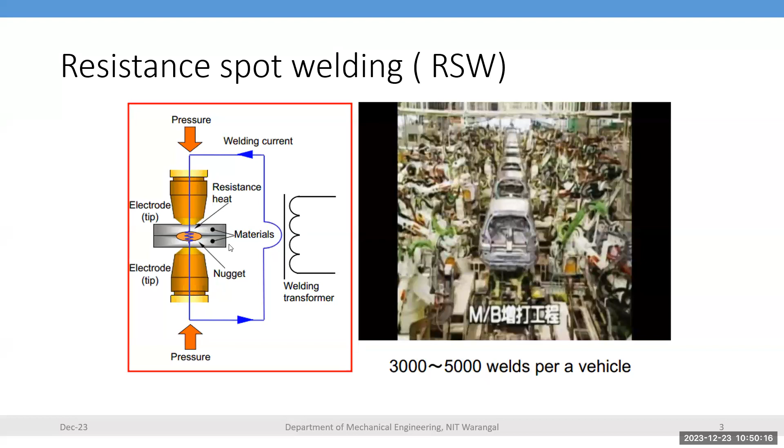Then how to judge the quality of resistance spot welds based on kinematics, dynamic mechanic properties, continuum mechanics, elastic and plastic deformation, and fluid dynamics, because you are melting the material and applying pressure between the two plates so that the material will flow in a particular direction. Then you can see the flow characteristics of the material during resistance spot welding.

Then thermodynamics, because heat is involved in the process, how heat is affecting the material properties as well as the electrode and other areas. Then electrodynamics, you are changing the resistance by applying heat. Sometimes you can have constant resistance, current distribution, and what is the Joule effect.

How heat is generated in resistance spot welding is H equals I squared R T. I is the current, R is the resistance, and T is the time for supplying the current. Based on that, heat is generated. So when resistance is very high, then heat generated is high, and when current is also high, then heat is also high. So based on these three input parameters, you can determine how much heat is required for a particular thickness of material to be welded through the resistance spot welding process.

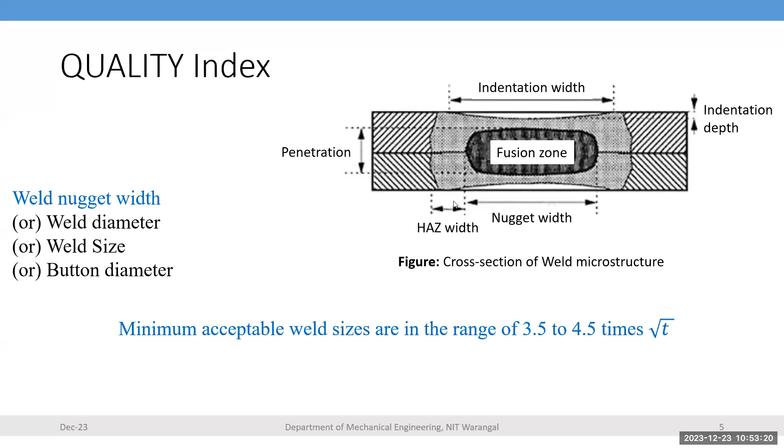This weld nugget geometry creates a need for monitoring data due to the complexity of the basic resistance spot welding process, and the complicated interactions between the input parameters, material properties, and input conditions of the process - so that we have a lot of interaction between the variables.

Then process conditions such as electrode wear, because you are doing multiple welds over a period of time. Due to that, heat is accumulated at the interface of the sheet and the work material. Anyhow, you are applying pressure, and due to that, heat accumulates over a period of time so that material degradation takes place, and wear of the electrode occurs during the process.

Then workpiece fit up, and water cooling rate - because you are circulating water to reduce heat accumulation in the electrode material. Then machine compliance, because you are applying force and other parameters, so what is the compliance of the machine.

Then electric current and voltage displacement and dynamic resistance signals, because you are supplying current and voltage during the process so that heat is generated. That heat is utilized to melt the two adjacent materials.

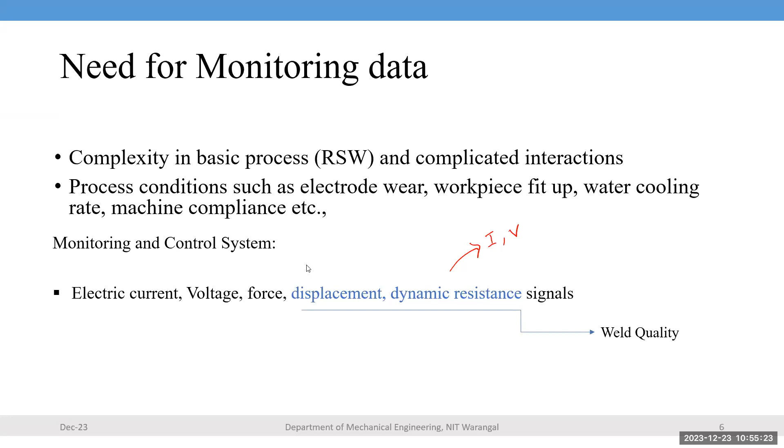So this quality of the weld, we can say is a function of dynamic resistance. The RSW, abbreviated as resistance spot welding, has monitoring and control systems. The welding system includes welding schedules and a monitoring system for how to monitor the entire data through DAQ and signal processing, and a control unit that takes care of all diagnostics and signal control.

The DAQ measures electrode voltage and welding current, how much welding current you are supplying in a cycle, and whether there is any variation during the cycle based on changing resistance. Then how much force are you applying? And what is the electrode displacement? Because every time it may not be aligned with the bottom of the electrode, the alignment may change, and due to that there will be a change in the nugget growth process.

The electrode tip voltage and current will tell you how much heat input occurs during the process. If you apply less heat than required, the weld nugget is not formed. If it is more than required, expulsion takes place during the process. So these are the two bad effects: low and high heat input will result in expulsion as well as the nugget not being formed, and due to that the weld fails.

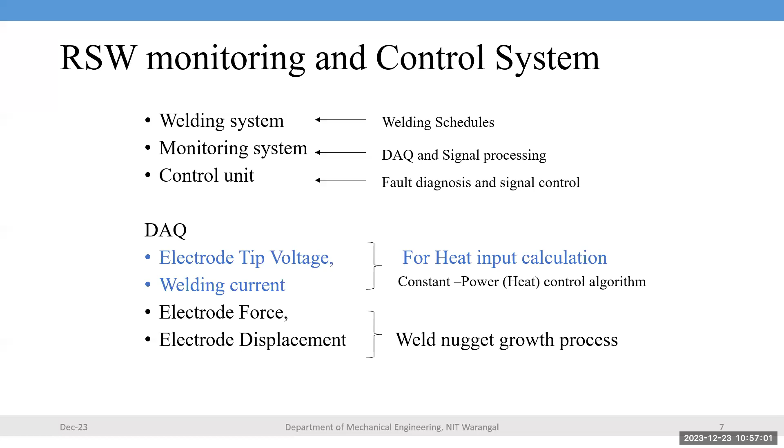Apart from that, heat is accumulated over a period of time, causing expansion of the material, because the material should have electrical conductivity and thermal conductivity. Then expansion takes place, then melting and expulsion, because of electrode displacement and force.

Dynamic resistance is a measure of electrical resistance change during welding, calculated from electrode tip voltage and current. That depends on the voltage and current you are supplying. You can also get the dynamic resistance from this. This is the basic information about the process.

That shifts the axis from one exact plane to another area, which leads to inconsistent heat generation during the process. Then there's the shape of the tip end. The tip end may change shape, which will change the resistance, so the heat generation also varies.

So this is the construction of a fully reliable resistance spot welding system, Toyota Motor Corporation. The welding current on the left side, applied pressure and welding time, and tip misalignment, tip end diameter, tip end curvature, edge welding, angle misalignment, sheet metal thickness ratio, sheet gap.

So as far as the project is concerned, either at BTech level, MTech level, or master's level, without applying machine learning algorithms, we only have to take a few, 3 or 4 parameters. For example, welding current, applied pressure, welding time, and sometimes we can also take angle misalignment, sheet metal thickness ratio, and sheet gap.

Based on that, we give input parameters so that we can get some output in the form of nugget area. So there should be a relation between the input condition and output condition, using statistical regression analysis. From that we expect the result, the outcome of nugget diameter or shear strength of the welded joint, which will give only 80 to 90% accurate results.

But nowadays people are not accepting this 80 to 85% response, because ultimately you are going to automate everything. So even a small change in the parameter will affect the entire system, leading to a lot of loss in the company. That's why this is not sufficient; an exact requirement is needed for automation of the process.

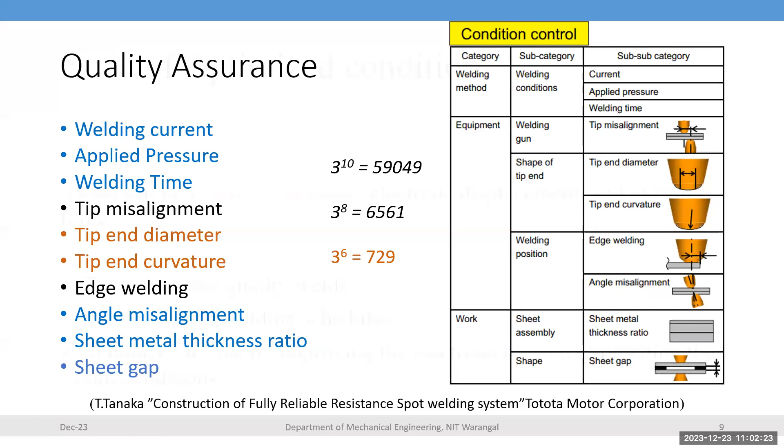Then we'll see what is the need for optimization, what is the important aspects you are going to get for optimizing the results, so that you can get the full automation of the entire process.

So then you need to observe the dynamic resistance during the process, electrode displacement, and dynamic force. These three things are important to analyze the data, and you can predict the performance within the acceptable limit.

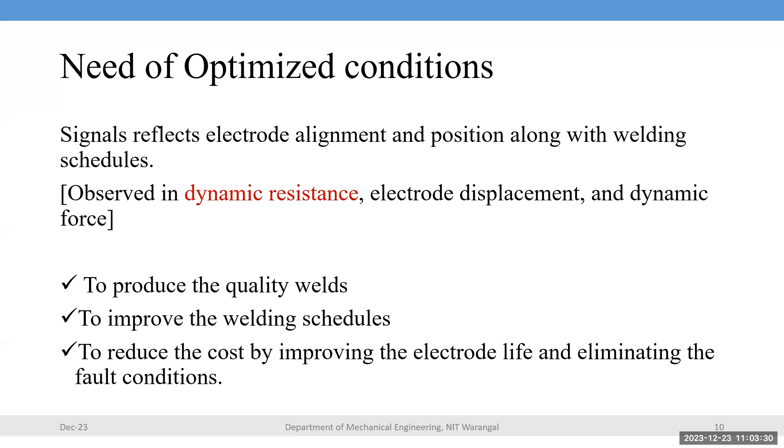From this observation of optimization, you can also produce the quality of the welds, improve the welding schedule, and reduce the cost by improving the electrode life and eliminating fault conditions. The signal reflects electrode alignment and position along with the schedule.

Then you are supplying the current and time, so the heat is generated, and the resistance increases to a certain level. Then after melting, it still increases to reach the maximum value. Then you apply pressure, because you are going to stop the supply of current. Then you apply the pressure, so that the nugget is formed, and the resistance changes.

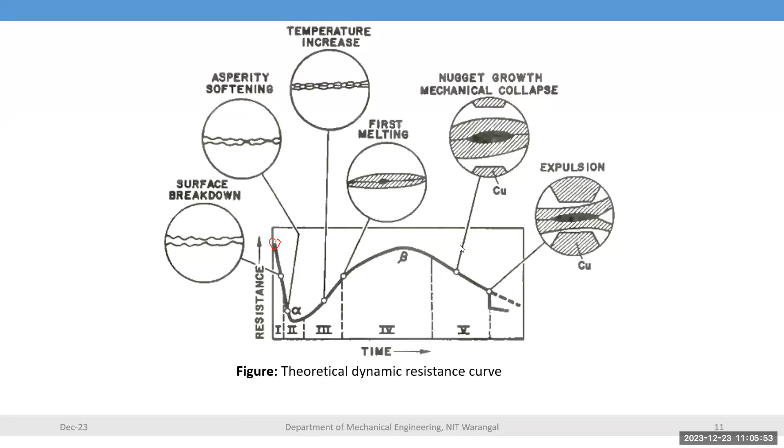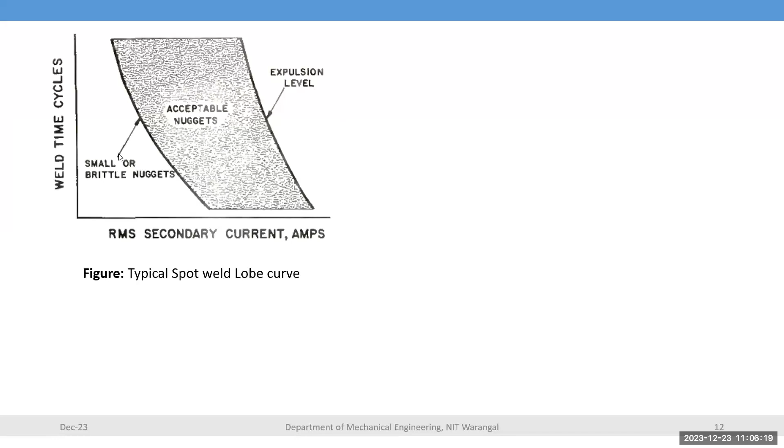Now, based on the RMS root mean square secondary current in terms of amps and the welding time cycle, this region is the acceptable nugget area. Beyond that, you have the expulsion level, and before that, smaller or brittle nuggets that lead to a defect kind of weld. So you can see the various dynamic resistance electrical parameters during spot welding of mild steel—resistance, current, and voltage.

You can see the normal curve without any expulsion, shown with a continuous line. This is the dynamic resistance curve. And you can see the voltage—you are going to supply the voltage up to maximum, then we are going to decrease the level.

Similarly, the current decreases, and after that it is almost constant, so you can understand very well about the dynamic resistance, voltage, and current, so that you are able to correctly get the relation between the input and output parameters.

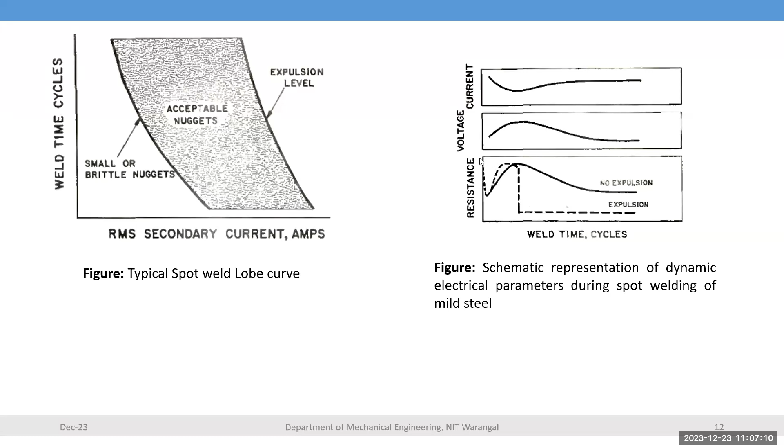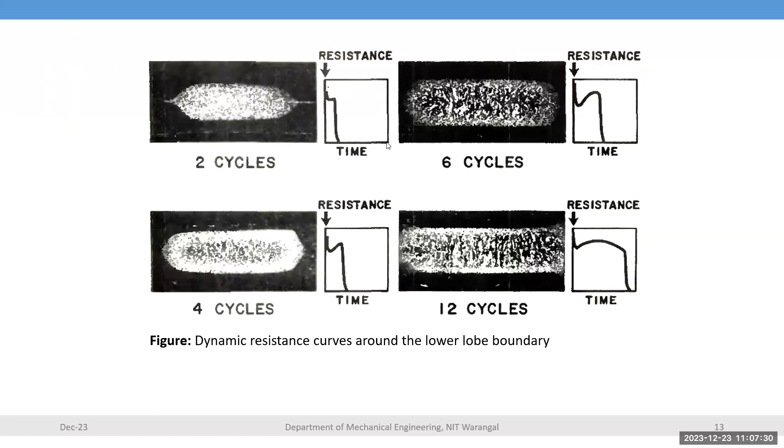So this is the number of cycles with respect to how the nugget is formed—this is 2 cycles, 6, 4 cycles, and 12 cycles. Based on that, you are getting the data from the controller. You can get the resistance, how the resistance is. As the number of cycles increases, the resistance curve also changes depending upon the number of cycles.

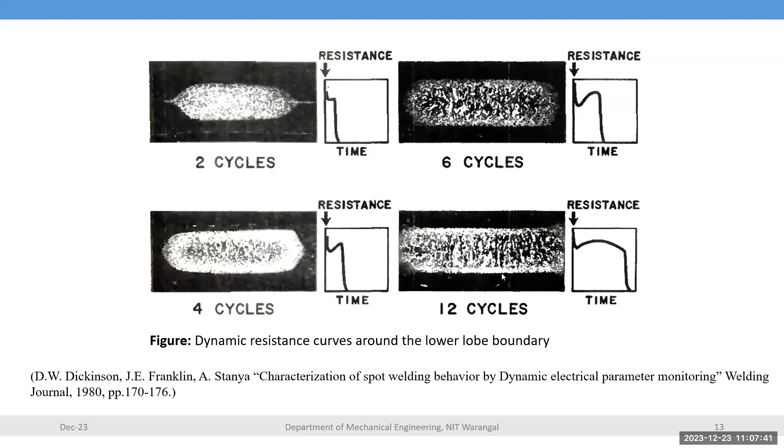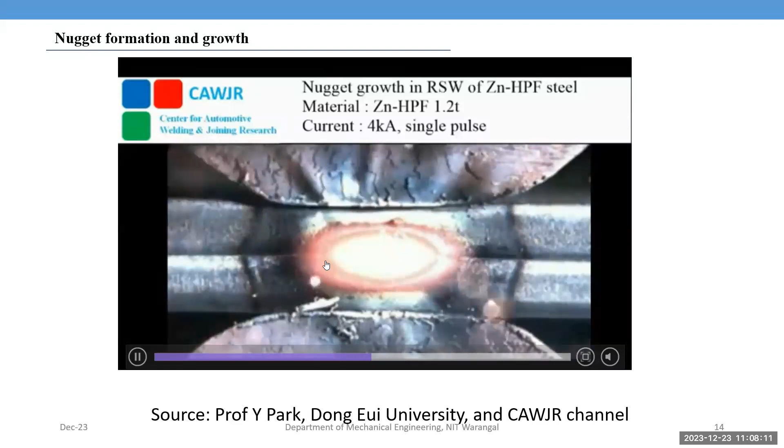Yeah, this is a resistance spot welding video. Just you can see how the weld nugget is formed. The smaller portion is melted, and you can apply the pressure, then allow it to cool, so that the black portion is the edge region, and the orange color region is the nugget portion. This diameter will define the strength of the resistance spot welds.

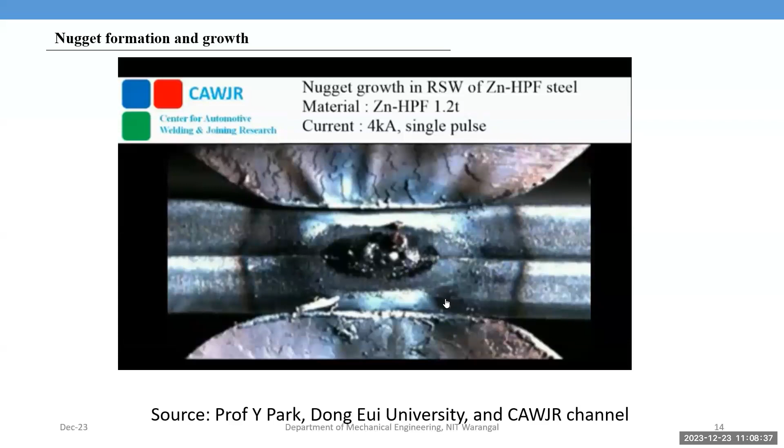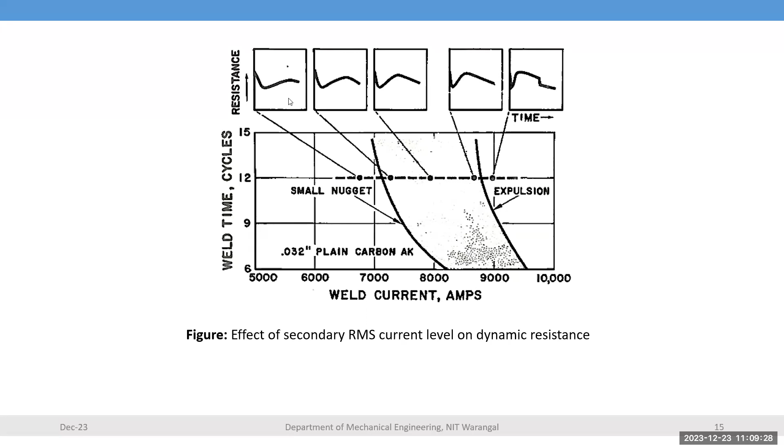Then if it is expulsion, you are going to get this kind of curve. If it is a small nugget, you are going to get this curve. So 1, 2, 3, and 4 look the same, but if you observe keenly at a high magnification level, there is a difference in the profile of each and every parameter.

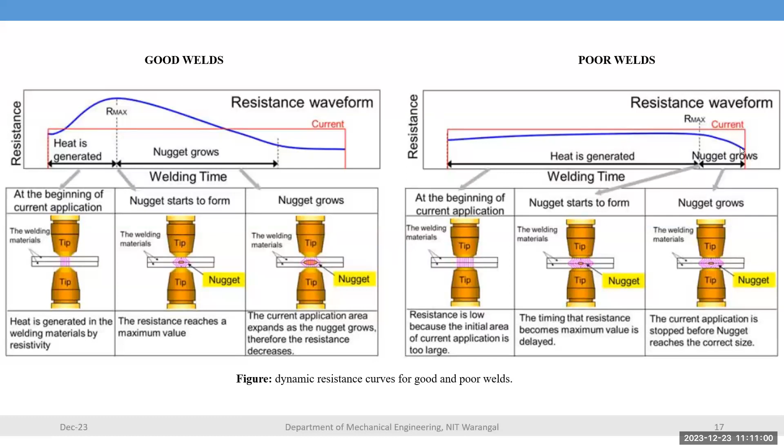Then machine learning algorithms require some characteristic data analysis, because you have to design the system in a very effective manner without any change in the quality of the welds. Now, this is the dynamic resistance curve. The x-axis is the weld time or weld cycle, and the y-axis is the welding resistance. Then what are the parameters involved in a particular shape of the curve? You can define these variables.

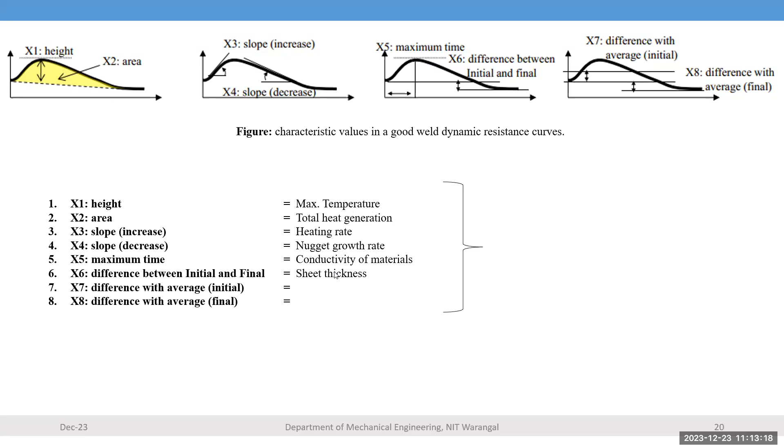So X1 greater than or equal to maximum temperature rise, and X2 greater than or equal to total heat input. X3 is the heating rate, and X4 is the nugget growth rate. X5, peak formation time, more means delayed peak. Nugget growth time is gradual if more. Heating rate is more if positive. Resistance drop greater than or equal to surface breakdown if negative. X8 more means gradual nugget growth or expulsion less.

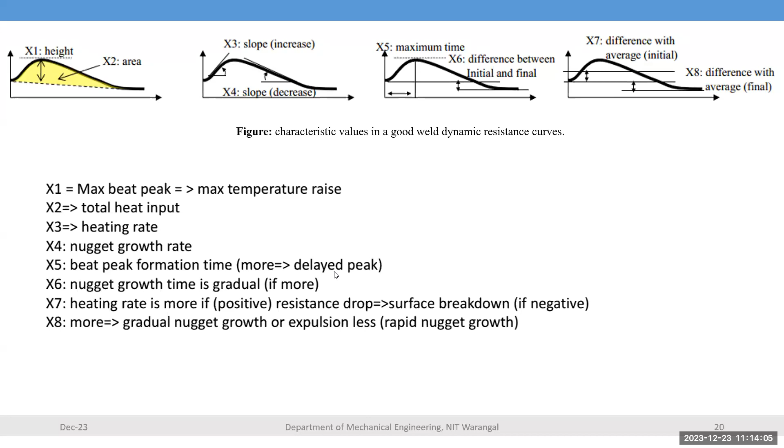So apart from this, set two of the experiment has 16 characteristics instead of 8. You can also extend it to 16 characteristics. 1 to 8 is set one, and for 9 the minimum time, that is alpha, is defined. Alpha is peak formation, that is nugget growth end. X12 is a positive or downward curve, X14 is energy required for melting, and X16 is maximum final slope, greater than or equal to negative growth.

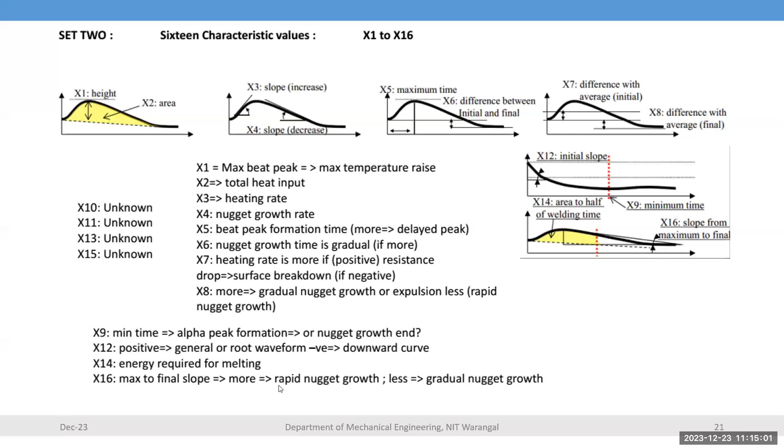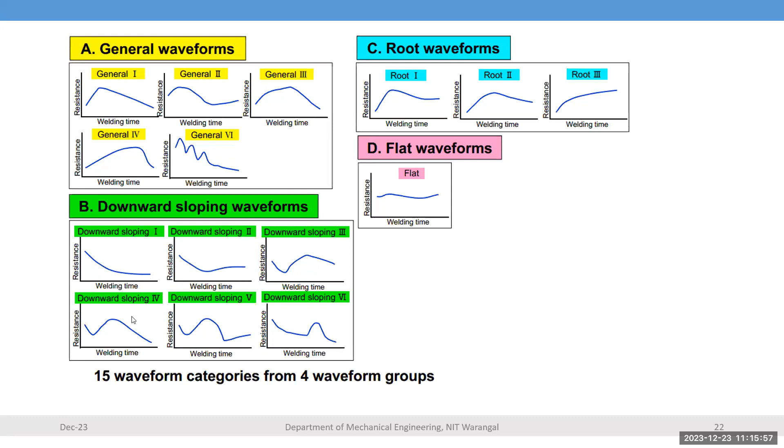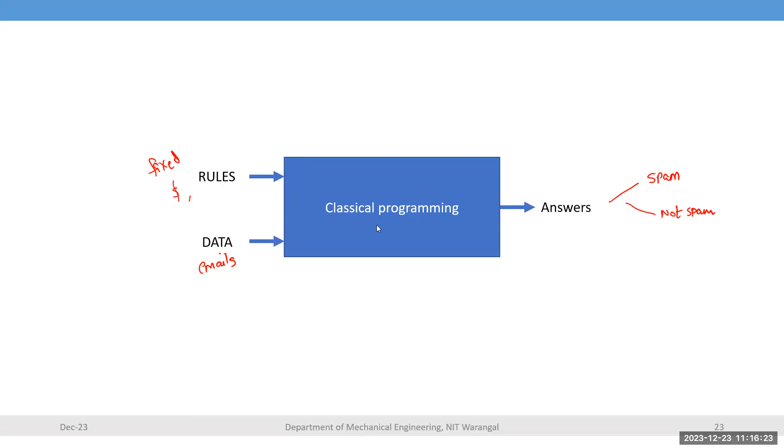Then downward sloping waveforms: this is upward and this is downward. Slope 1, slope 2, slope 3, and slope 4. These you can already define in the machine learning algorithms. Now, classical programming requires data. How much data is required for programming classical programs so that you can get some defined answers? Then what are the rules that are required for the classical programming? Now we will come to machine learning.

So before these slides, first you need to understand the system. From that system, how you are defining the variables, then what is the effect of each and every variable on the dynamic resistance curve. Based on that, you can have some input data. That input data is given to the machine, and it will train and give output in an effective manner.

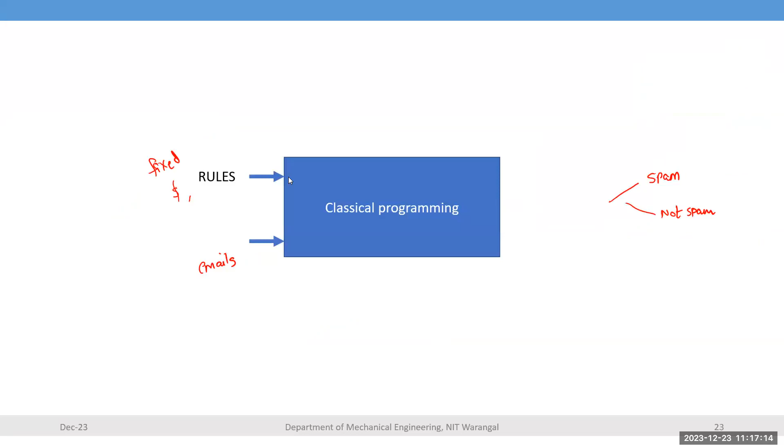So first, initially we have to give the input data of welding parameters, work parameters and tool parameters. From that, you can get the dynamic resistance curve. From that dynamic resistance curve, we can analyze the data and give an effective method of interpretation of the input and output variables.

So you are giving some input to the machine learning, and you expect some output or targeted value. How much target is required, that also you can give as an input for the machine learning. That is maximum and minimum. Beyond that, we cannot go for the interpretation of the data. Within the minimum and maximum level, we can work on this.

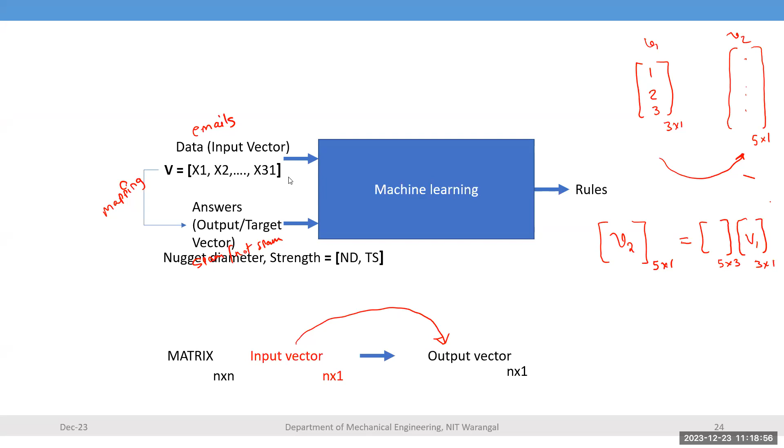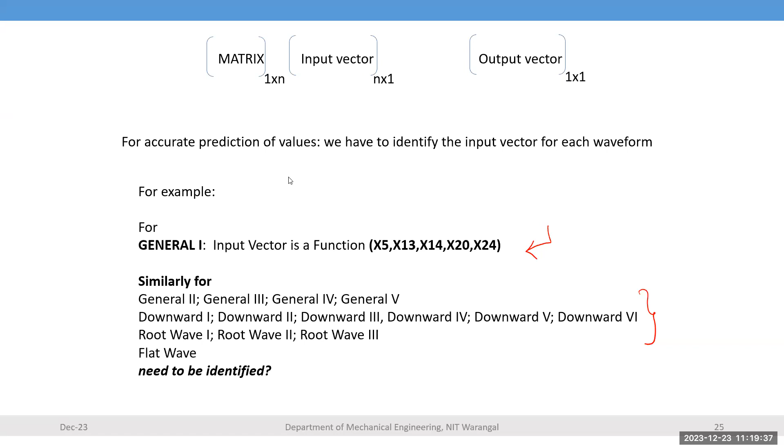Now it is in the form of a matrix 1 into n, that is x1, x2, x3, x4 variables, and the input vector n into 1, then the output vector. So for accurate prediction of values, we have to identify the input vector for each waveform. For example, the general one input vector is a function of x5, x13, x14, x20, x24. Similarly for general 2, general 3, general 4, you can identify which variable is more dominating with respect to general 1 or 2, etc. That needs to be identified.

Then what are the steps involved in machine learning algorithms? Initially you have to gather the data. Decide what data is part of the problem. The data is reflected in your output parameters. So whatever data you are giving as input to the machine learning algorithm is more important. And more and more data will give more accurate results.

Then preparing the data, ensuring that there is no bias between these three or four values, because during experimentation, suppose you are giving one input condition and you run the experiment for more than 3 or 4 trials. For example, one value is 10, another is 12, another is 11, another is 10.5, another is 25. Three values are very close, and the fourth one is away from them.

Then you can eliminate that fourth value from the input data for the machine learning algorithm, because there is some variation in the process that leads to a value other than one near your mean value. So the mean data is important. Data nearest to the mean is very important as input to any machine learning algorithm, so that you can get an effective relation between the input and output conditions. You can also train the data effectively. So that is important: there is no bias in taking the data from a number of points.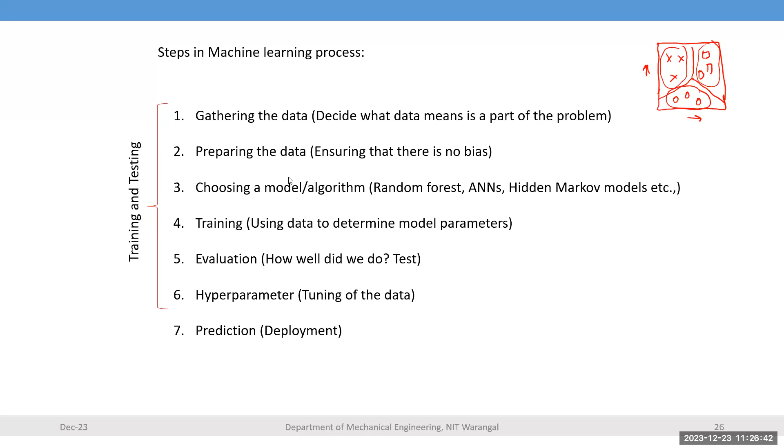Then hyperparameter tuning. Suppose data is inconsistent in some cases, then you can tune the data as per your requirement or as per your model. Then prediction and deployment: how you are predicting the future performance based on your algorithms.

I'm not going into detail on machine learning because many speakers have already spoken on supervised and unsupervised learning. For mechanical engineering, we need to learn more on supervised learning because the property is available for a certain data set, but is missing and needs to be predicted for other instances. Where quantitative values are available, you can use the supervised learning process.

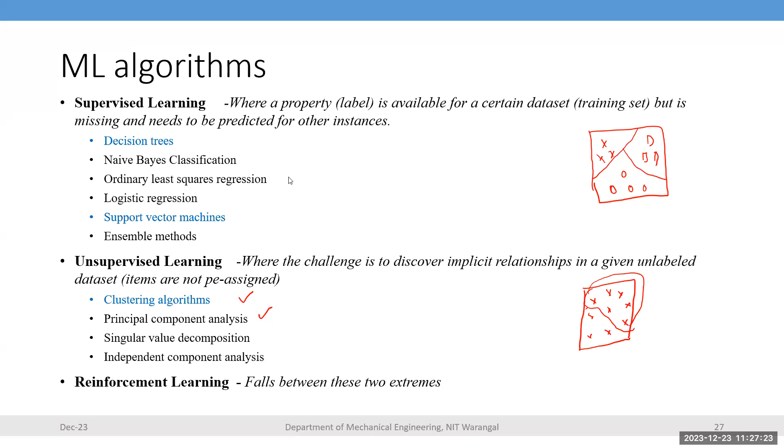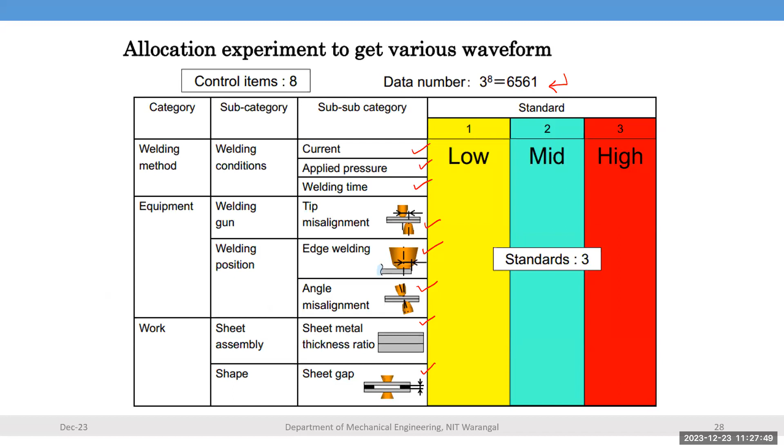Here, the allocation of experiments gives various waveforms and categories of the welding method, for example low, mid, and high. Depending upon your experience and the literature, you can quantify the data in terms of 1, 2, 3.

These are the dynamic resistance waveforms for good welds on the left side and bad or defective welds on the right side. These are obtained from automatic machines. From that you get the dynamic resistance curve because they have performed a large number of welds. From that you identify the good welds after characterization, and based on that you define which curves are related to good welds.

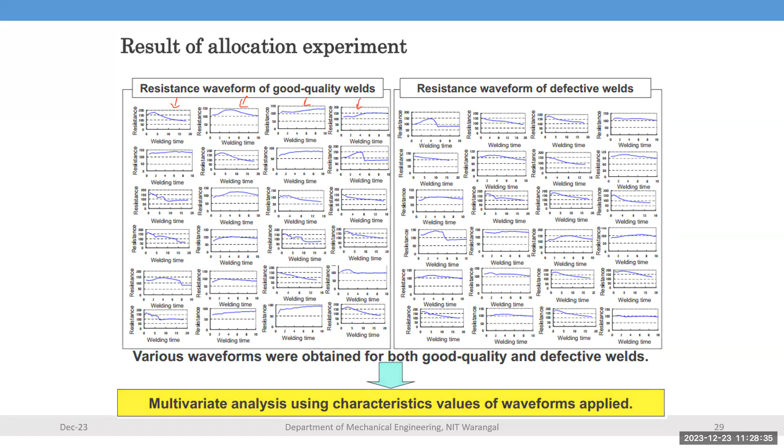Judging by discriminant analysis, you can see the, let us say, correct judgment rate is 88%. Discriminant analysis was performed for 6,561 samples of good quality welds and defective welds. So judgment is okay because more quality welds are towards the top side; only a few welds are going downwards, that is, defective kind of welds.

So the more data is clustering in a particular place, that gives a good type of welds. Suppose the judgment rate is more than 88%, then you can see this judgment is okay and judgment is negative, so that you can get good quality. So from this group variable, good quality or defective welds, you can say yes or no. Then the explanation variable, 8 characteristic values.

Here he has given x1 is the height, x2 is the area, x3 the slope, x4 is the decreased slope, x5 is the maximum time, x6 is the difference between initial and final value, x7 is the difference with the average, and x8 is the difference. Whatever variables are measured without any deviation from the real pictures or real graphs, you can take 8 variables from that and get this kind of parameters.

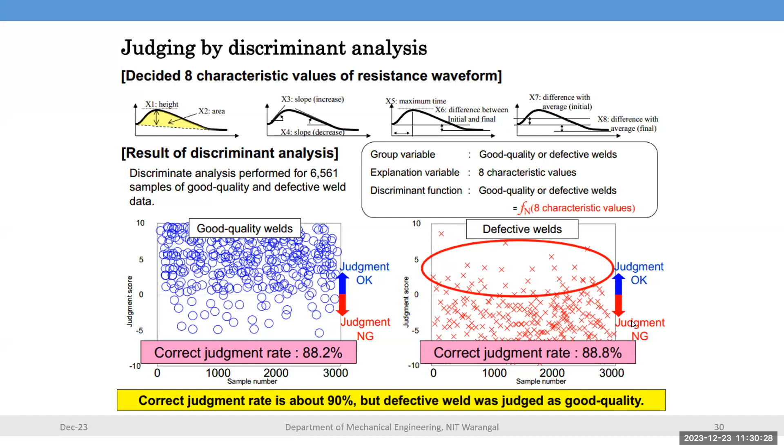So for this case study, we have taken 2 sheets of similar and 2 sheets of dissimilar kind of materials. That will define the thickness ratio: 1.6 times the thickness, and 1.6, both material thicknesses are the same, but here, dissimilar kind, the sheet thickness is different, 1.6 and 1.2, so the total thickness of the entire nugget formed is 3.2 and 2.8. The welding current applied during resistance spot welding is 8.6 kiloamperes and 7.7 kiloamperes. Then welding cycle time is 20 cycles and 18 cycles.

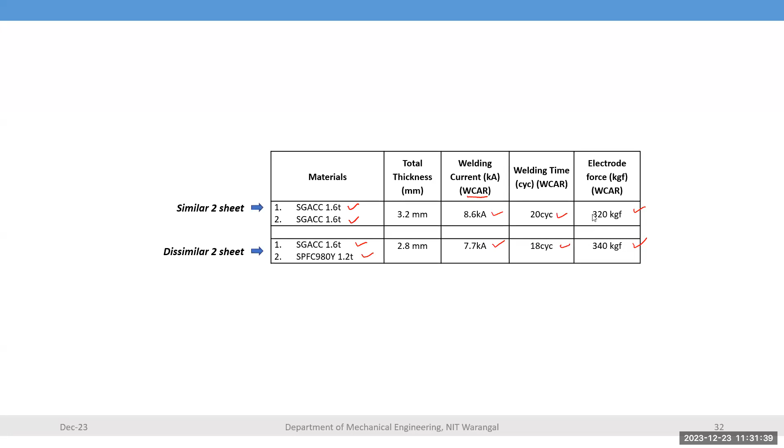Then how much force is required? 320 kg force and 340 kg force are required. So these are the variables: minimum is 2.8 and maximum is 3.2, and here also 7.7 and 8.6, 18 and 20, and 320 and 340 kg force. So this is the experimental layout: welding current, applied pressure and welding time, and edge welding 0. And here you can also go with 2 mm edge welding. Then angle misalignment 0 and misalignment 3.

Intentionally, we are giving the sheet metal thickness ratio 2.8, 3.2, and the sheet gap, you can see 0 and 3.2. So this is a two-level experiment. There are 7 parameters. 2 to the power of 7 is the minimum number of experiments required to run the process. 2 to the power 7 is 128 experiments. So at least you have to run each experiment 3 times. 384 experiments are required for analyzing the data.

So out of 384 experiments, you can also see the information just given about the biased data. If the three output parameters are near to each other, you can take the average. If any one of them is away from the average, you can leave that one and make the average again.

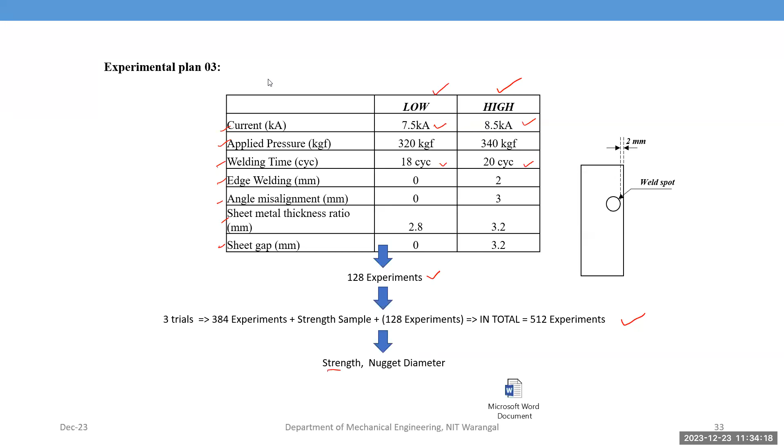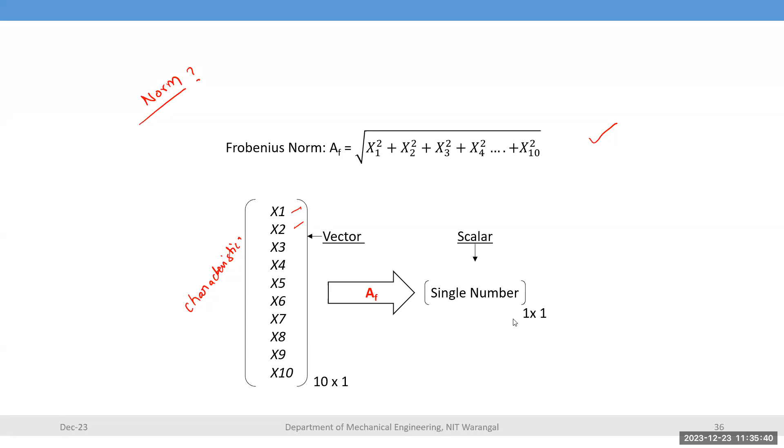As input parameters, in order to examine the variation of trend of the resistance, the standard deviation of the dynamic resistance x9 and the standard deviation of the variation per cycle in dynamic resistance x10 were used. So the Frobenius norm is the square root of all the output of the vectors. So x1, x2, x3, x4, so many characteristic variables, you can convert into a single number, that is a scalar. For that conversion you can use the Frobenius norm.

Yeah, from that, you can see the resistance values of different variables. From that, you can convert into Frobenius norm 519.71 from this row, and from this 522.8. Then you can draw the curve between the weld time and dynamic resistance for 7.5 kiloamps and 8.5 kiloamps. From all these values you can find out the Frobenius norm. So this is with reference to the variation of current from 7.5 to 8.5 kiloamps.

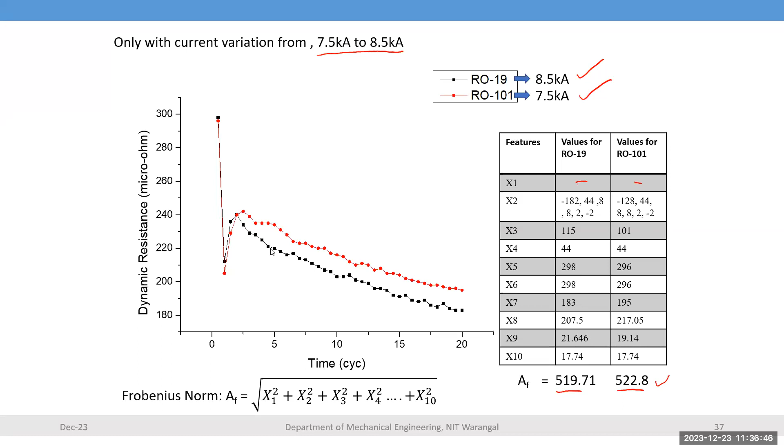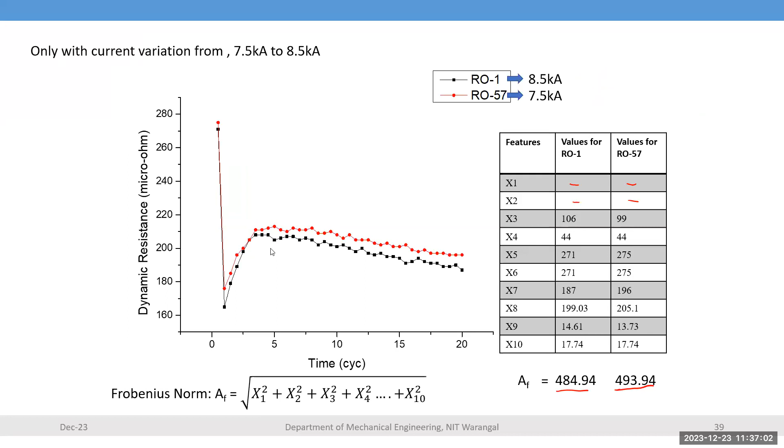So this red color is 7.5, and the dark one, or black one, is related to 8.5 kiloamps. So welding current in the selected experimental layout, you can see 7.5 and 8.5 kiloamps. Then the sheet gap, what is the sheet gap between these? That is 0 and 3.2.

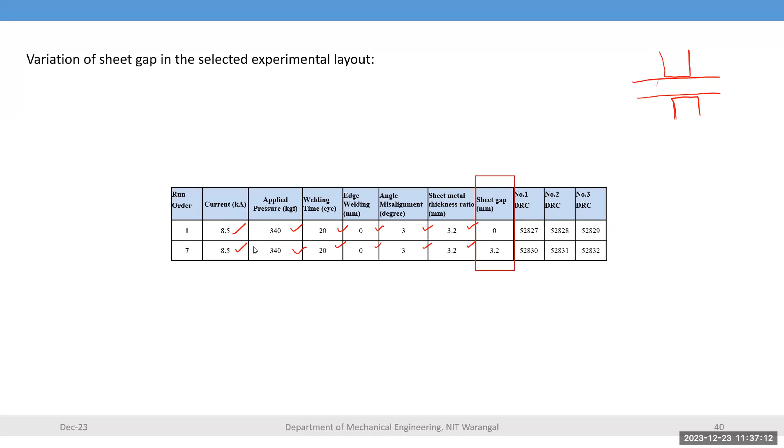So from this, what is the dynamic resistance curve? We are going to change it, because if it is 0, black color is 0, it is like this. If it is 3.2, it slightly changes in some positions. From that, you are going to get 484 and 488. There will not be much change in the Frobenius norm, even if you change the gap.

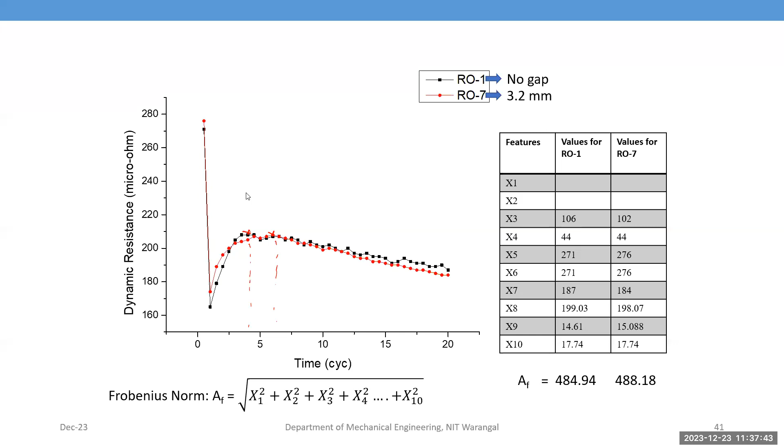Then variation of welding time in the selected experimental layout, you are going to change the welding cycle time. So RO1, 20 cycles, and run order 39, 18 cycles. Then you are going to get these kinds of values. From that you are getting the Frobenius norm 484.94 and 493.

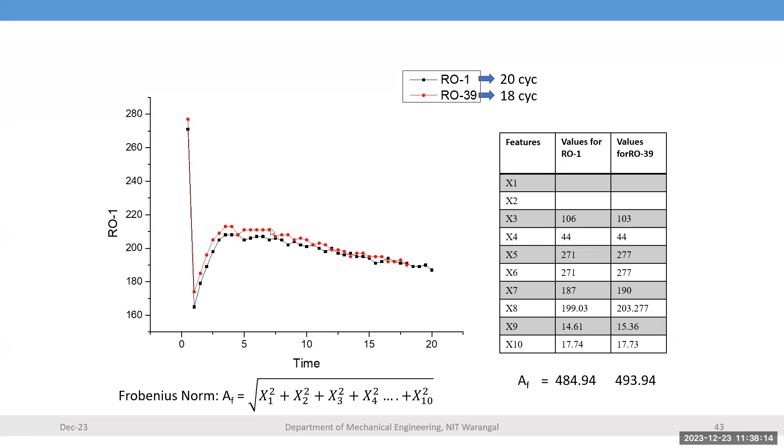Then effect of electrode force in the selected experimental layout, because he has done a lot of experiments. From that he has selected run order one related to 340 kilogram force, and run order 100 related to 320 kilogram force, so you are getting different values of x3, x4 like that. So you are going to get a different dynamic resistance curve. From that you get 484.94 and 513.86.

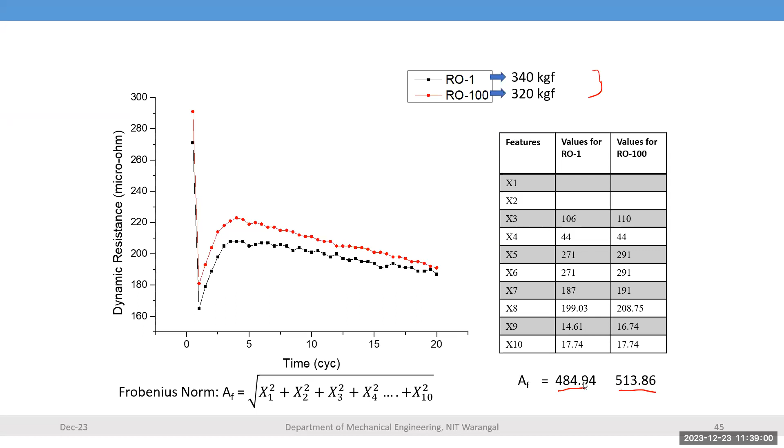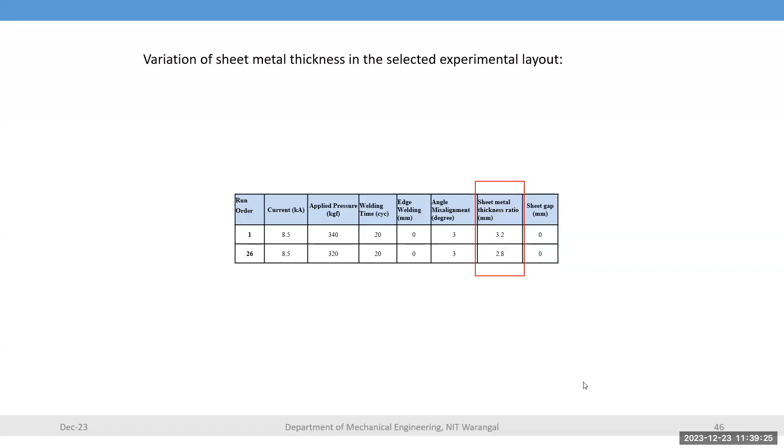Then variation of sheet metal thickness in the selected experimental layout. Initially I showed you in one of the slides the variation of thickness between the two groups, 2.8 and 3.8, and also similar and dissimilar nature. So not only difference in thickness, but also similar and different kinds of materials. Now, run order 1 is 3.2 mm, and run order 26 is 2.8 mm. You can observe there will be a change in the dynamic resistance curve.

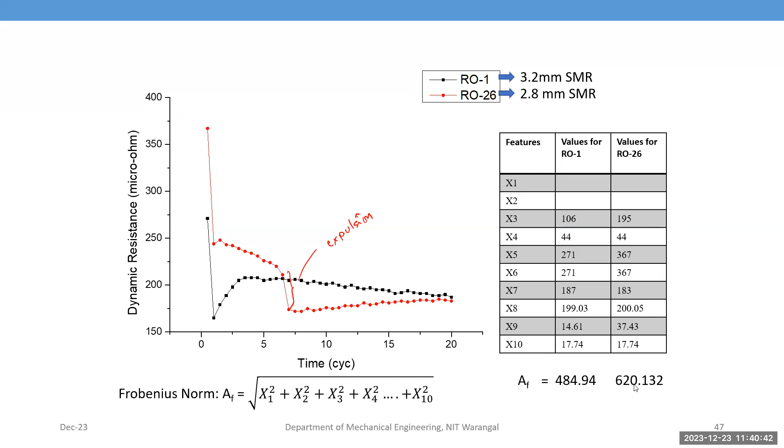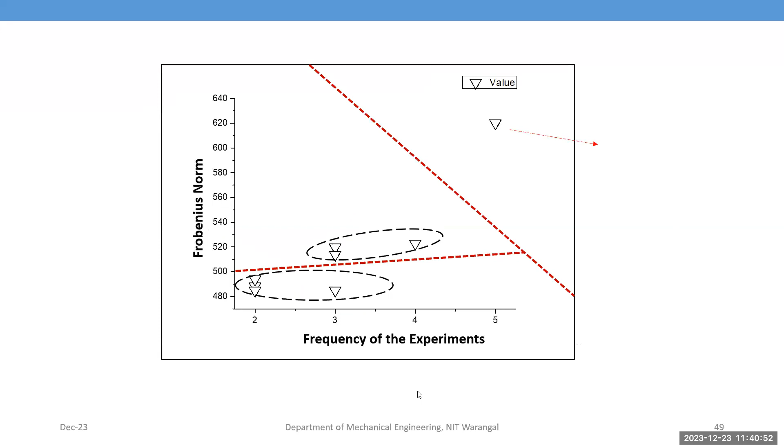Then you can see there is a large variation in the Frobenius norm. This is 484. This is 620. So from this, you can see the observation of various Frobenius norms, and based on this, this value refers to expulsion. This is out of the region of your domain, and this is also out of the region of your domain, because it gives a different kind of weld that leads to brittleness of the weld, so the ductility is less.

So for very good welds, the Frobenius norm, you can see, is 400, 450, 451 to 500, and 501 to 5 like that.

From this Frobenius norm, we can differentiate three regions. The middle region gives the non-defective nature. A Frobenius norm less than about 550 reflects good quality welds, while more than that or less than 400 leads to defective welds.

From this segment, the algorithm automatically generates this picture, so that the region above is unsafe and the region below is also unsafe. The middle portion is the safest region.

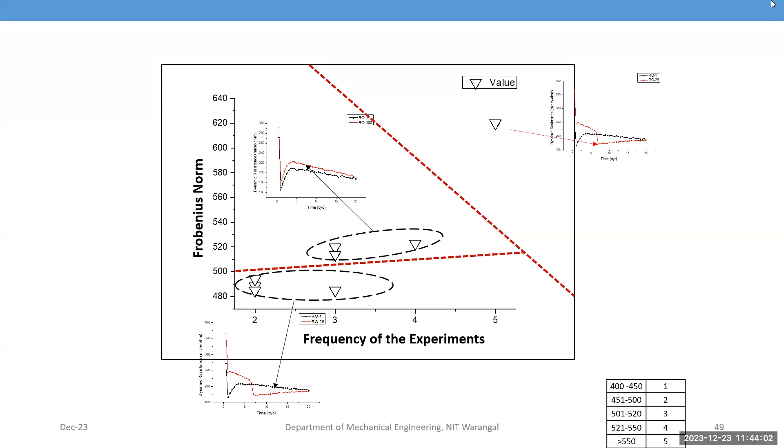For that, we need optimization techniques using Taguchi methods and central composite design, which are used to predict the equation through principal component analysis. From that, you can predict the equation with reference to the input variables, and generate a lot of data in between the variables.

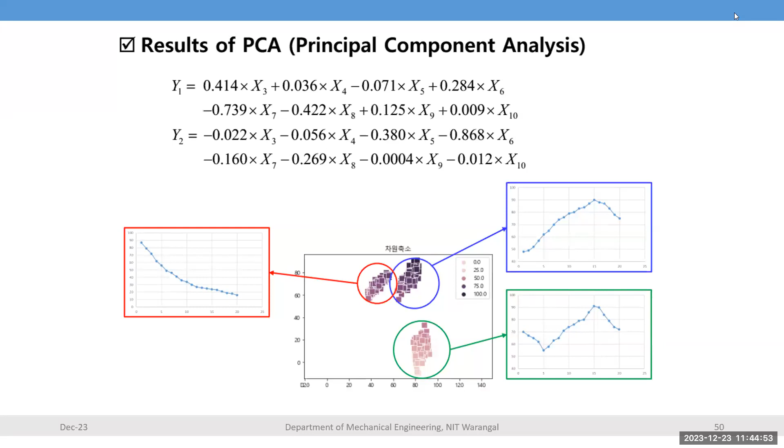For example, if a variable ranges from 10 to 20, I may have only worked on 10 and 20, without data in between. But using the equation from principal component analysis or regression analysis, you can get the relation between output and input, so you can generate intermediate data points like 11, 12, 13, 14, and so on, giving you more data without much additional cost or time.

Some clustering analysis shows the clustering data. One set has 200 points of X1 and X2, using 4 different methods, classified into 2 groups—whether it's bad or good—depending on the data available. This is generated automatically from the software.

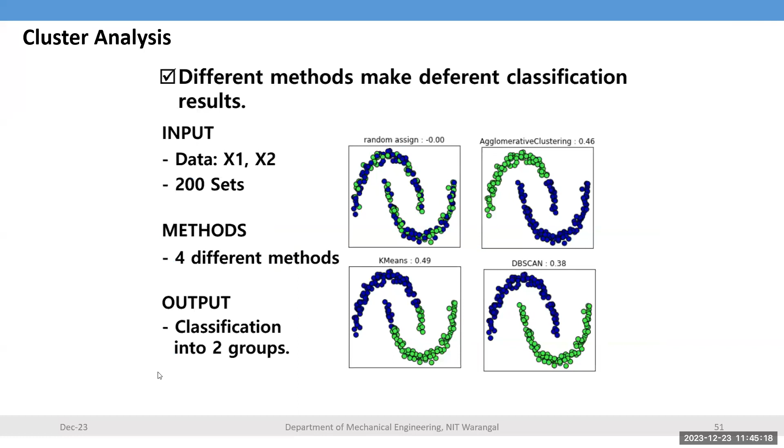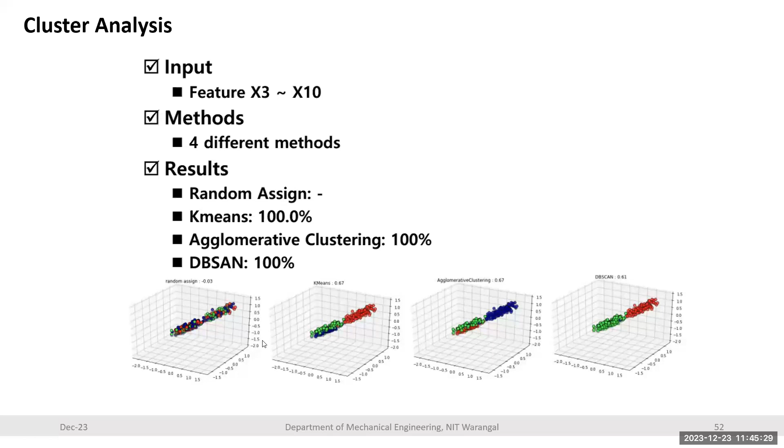Then this is the cluster algorithm, from which you can judge which method gives better results and which does not, considering inputs like rotation speed and feed rate. This is the machine learning algorithm.

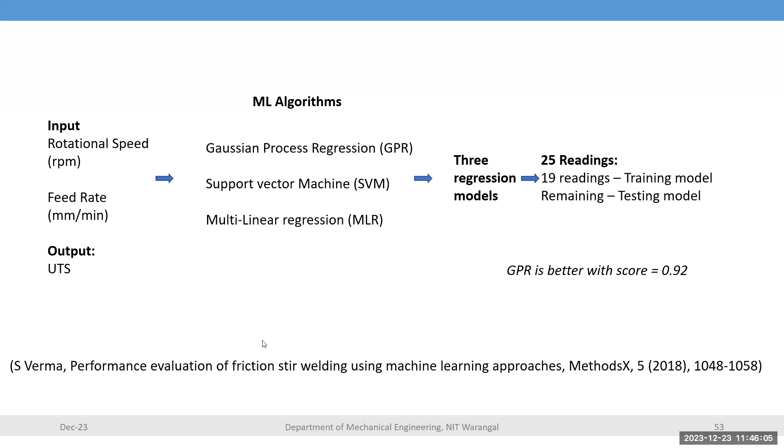Gaussian process regression, support vector machine, and multilinear regression analysis—normally we work on multilinear regression analysis. Using that, we can apply regression and get some equation, then use the machine learning algorithm to get a better judgment.

Sometimes, as I said, using central composite design with current, voltage, and travel speed, you can capture arc sound welds and perform statistical feature extraction. Then applying decision tree algorithm and random forest algorithm, you can identify good welds, lack of fusion, and burn through.

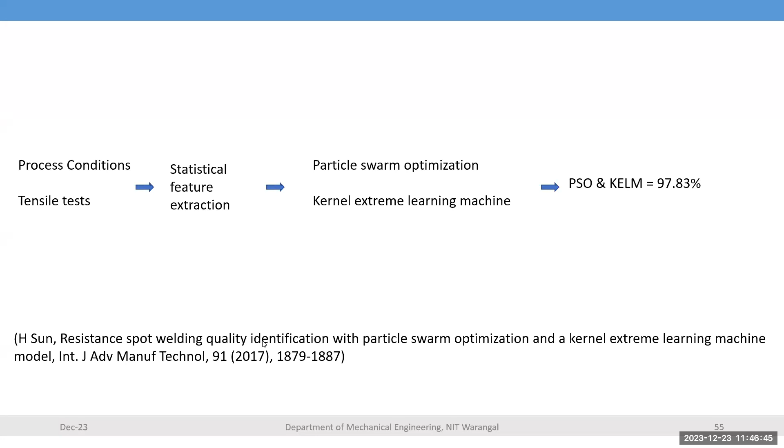Then from process condition and tensile testing, statistical feature extraction, particle swarm optimization, and kernel extreme learning machine—using PSO and KELM—you can get more information.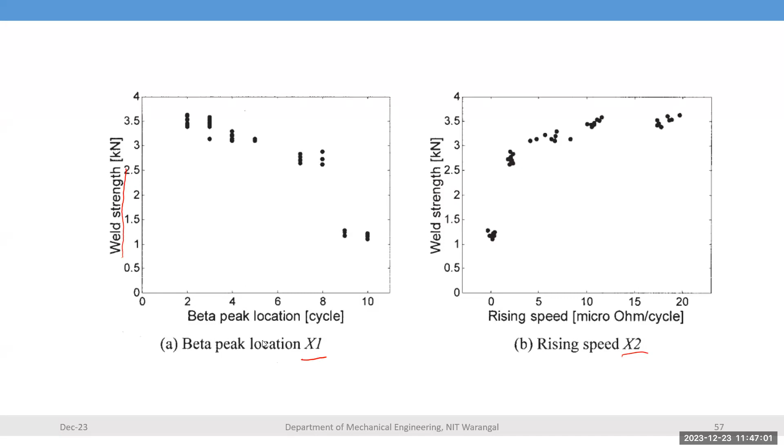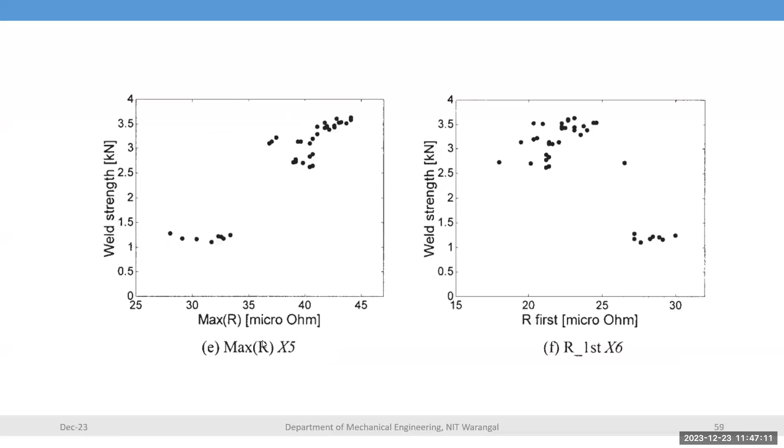We need to establish the interrelation between the dynamic resistance curve, the surface image, and the cross section. After that, you are going to see the actual scenario.

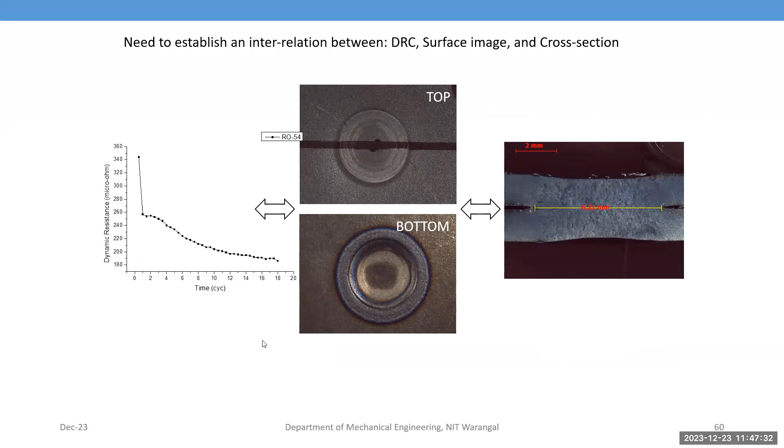In another trial, trial two, see the values 5.18, 5.29, 5.58. What I'm trying to say is these two are very close, while this one is away from them. Yes, you can take the average of these results to get a better one.

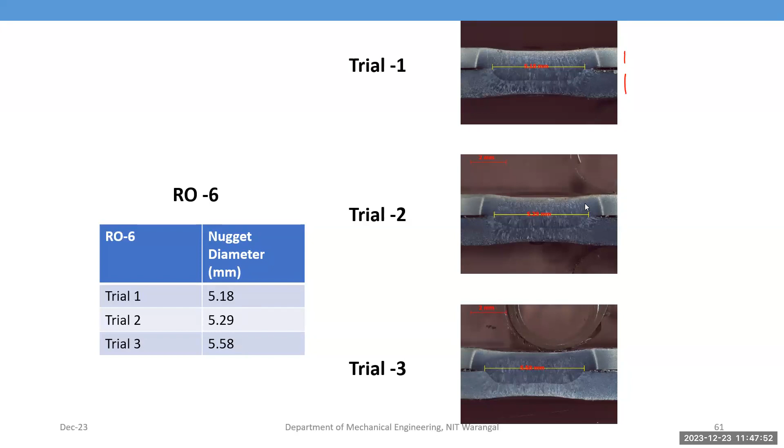So not only input variables which influence the output parameters, there are also some other noise factors that we can study in Taguchi and design of experiments. These are noise factors which are not controlled by you or the process, and that will lead to variation in the results.

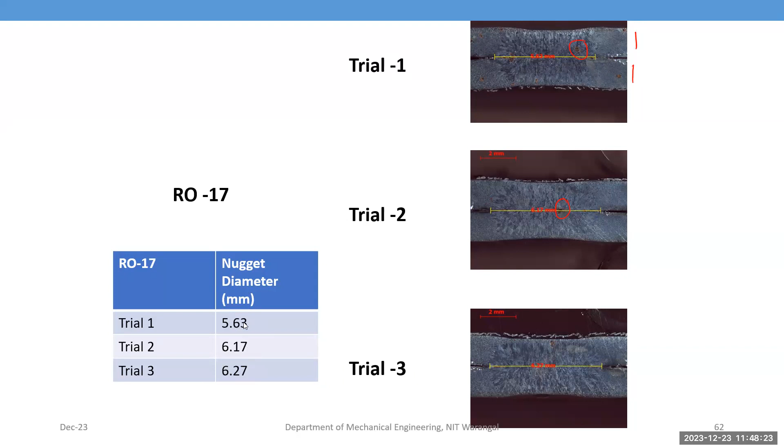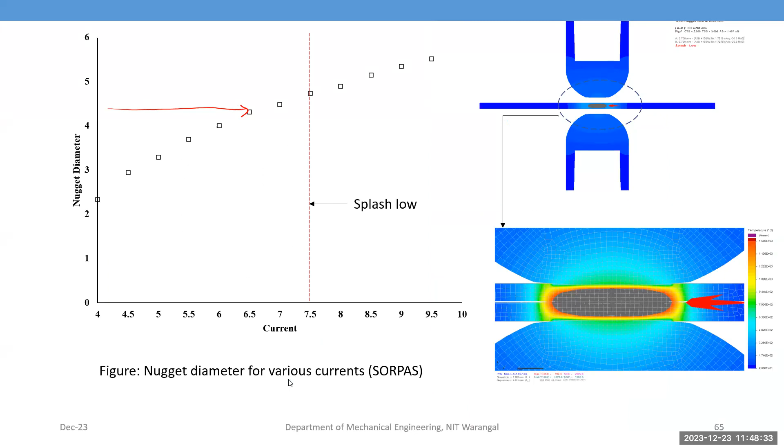So here we have 6.17, 6.27, 5.63. Trials 2 and 3 are very close, so you can eliminate trial 1 when taking the average. You can also do some simulation to get more data for analyzing more effectively using machine learning algorithms. Based on this, you can also draw a curve that will give more information to those working in this area.

Workpiece warping - let's say the first condition is warping, so the resistance is going to vary with respect to time. Then it's a normal condition. Then poor conductivity. Then electrode axial dislocation, shown as the dotted one.

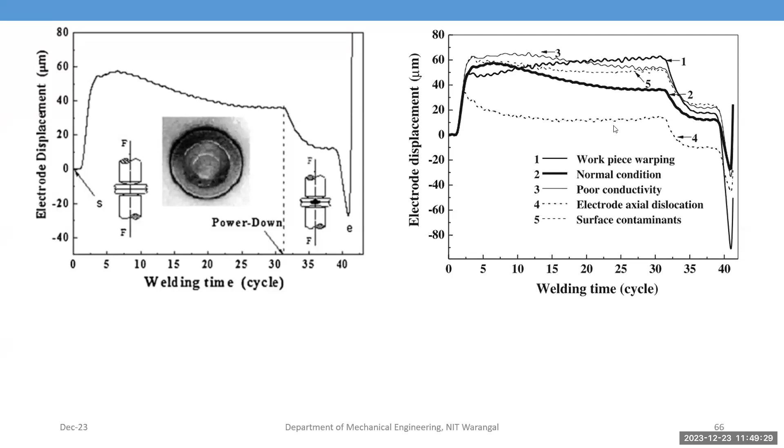Then the fourth one is electrode dislocation. Then surface contamination - sometimes if you are not removing unwanted materials, that contamination leads to a decrease in the flow of current between the two sheets, which decreases the heat input to the process. This is again electrode displacement, electrode wear, and adaptive controls.

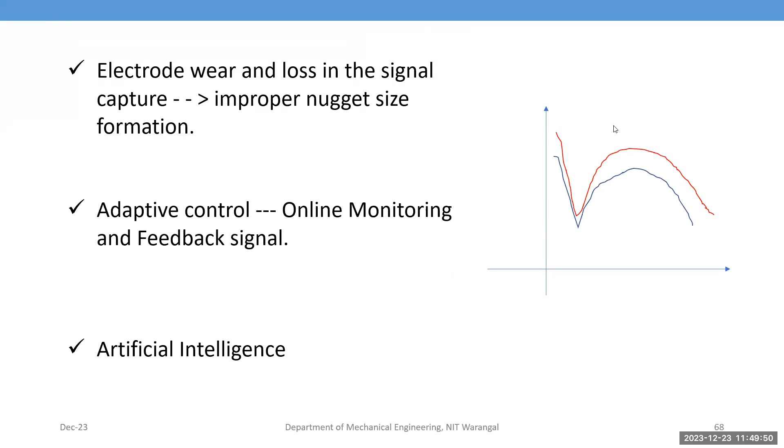You can also use monitoring and feedback signals so that you automatically change the input conditions. Then finally you can apply artificial intelligence to perform the experiments without manual intervention.

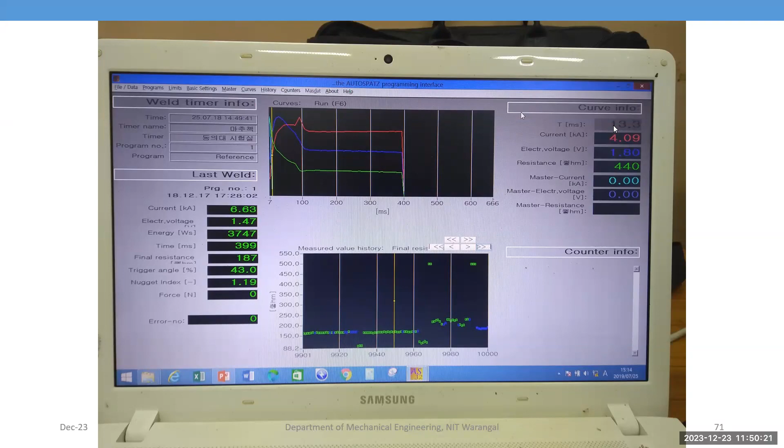This is a dynamic resistance curve from the control panel. This is a weld nugget portion. You can also see the metallurgical aspects, the temperature at various locations, and from the phase diagrams you can see.